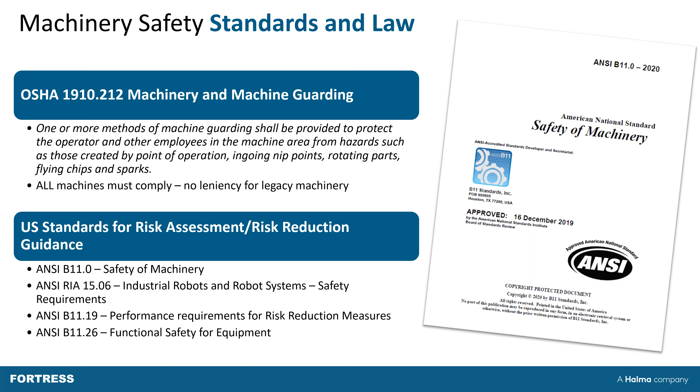Then what's going to be interesting on the next step is going to be B11.19 to look at risk reduction measures and B11.26 to look at functional safety. We don't have time to go into those in tons of detail now, but hopefully you can see how those follow on, and we may be doing more webinars and we can have a chat about some of that as well another time. So when do you carry out a risk assessment?

Some of you may think you've done a risk assessment before. Some of you may be here because you've never done a risk assessment and you're not sure where to start. And I'm going to say that actually all of you have done a risk assessment, even if you're not driving into the office much these days. You certainly will be driving up to intersections fairly frequently. And every time you come to a stop sign or any kind of intersection, you're doing a risk assessment.

You're deciding, is it safe for me to go? Is it not? Crossing the road, driving, anything like that. You're doing continuous risk assessments. And that's really important to remember. You already know what you're doing. It's not as difficult as you might think.

Another place is, for example, I do a lot of road cycling. When I go cycling, I will wear a helmet because that will reduce the severity of harm that might happen if I were to get in an accident. I'll also wear maybe high vis and lights, especially if I'm going at night. And that's going to reduce the likelihood of that hazard or that accident occurring.

So I do something to reduce the severity of harm. I do something to reduce the probability of harm. And I decide that that is an acceptable level of risk, and I go out on my bike. Other people might decide it's too high risk and prefer to stay in on the couch. That's up to you. Different people have different levels of risk and different levels of acceptable risk.

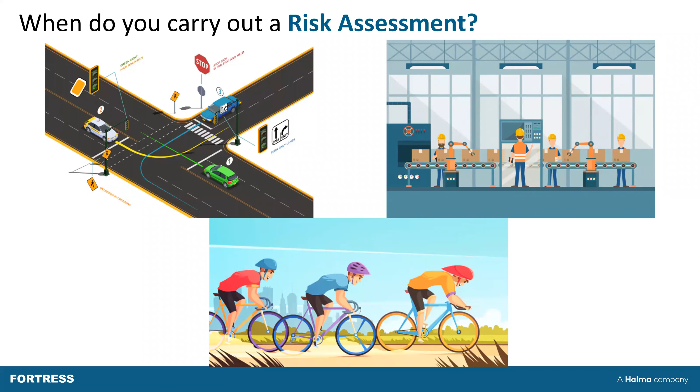And then finally, of course, what we're talking about here is machinery safety, industrial safety in a factory environment or anything like that. So why is a risk assessment important? Of course, that first one at the top there, reducing the rate and severity of injuries, makes a lot of sense. Hopefully that's why you think doing a risk assessment is important. You don't want people to get hurt.

Great start. However, there's actually a bunch of other reasons, if that's not good enough, to get that sign off on some safety equipment. It's great for employee morale, not only showing people they're cared about, but if they are allowed to get involved with the risk assessment process, which is really recommended, then they're going to feel valued and more likely to follow the requirements that come out of it as well.

Increasing the understanding of the hazards of plant operations. People often think carrying out a risk assessment is going to make things more cumbersome, more annoying, just putting things in the way. But actually, if a risk assessment is carried out well, you're much more likely to find processes which can be done better, accessing less frequently, shutting everything down less frequently, and actually increasing productivity. So there's really no reason that putting more safety in would ever reduce productivity. In fact, you can often make it more safe and more productive, which is a win-win for everyone.

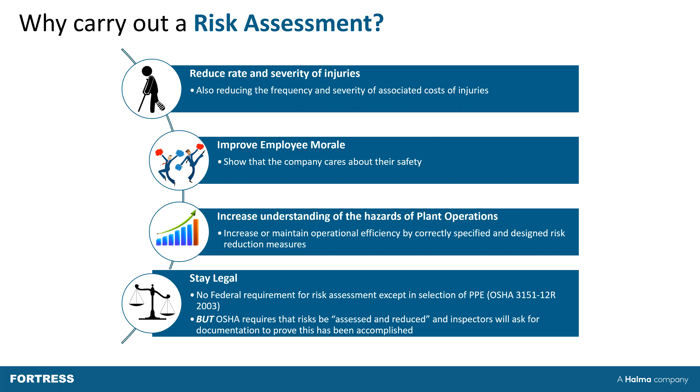Key definitions. An interesting thing about standards is often they're not necessarily the same definitions as in a dictionary. So in this, harm is specifically physical injury to and damage to the health of people. So we're not going to worry about if anything else is broken. It's only if people are in danger.

And then risk reduction measures is something that I'll mention quite a few times. People may know this as safeguarding or safeguarding measures, but we don't really like the term safe in standards because nothing is ever inherently safe. So risk reduction measures is much more accurate, even if it's a bit more of a mouthful, because it is reducing the risk. You may need multiple to reduce it far enough, or it may not reduce it very much, but it is still reducing risk. It's not necessarily making it safe in inverted commas, whatever safe might mean. And then acceptable risk is when it is at an acceptable level.

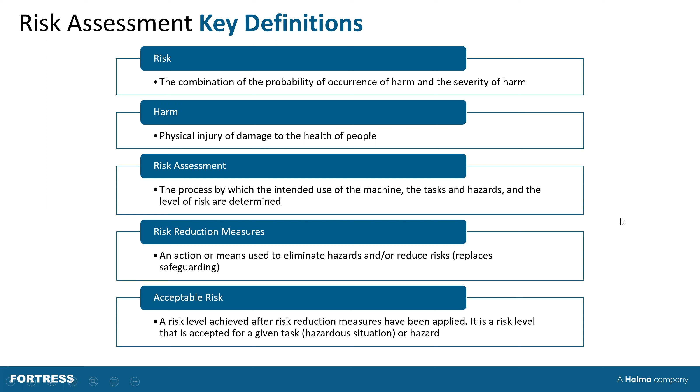So another kind of important step is thinking about who's involved. And then again, in standards, there's very specific definitions of who each person is, and this is what B11 uses. So you have individuals, which are affected persons if they're nearby, personnel if they're kind of employed to be near the machine. Those personnel may have different roles. So there's operators doing normal operation, there's maintenance personnel, there could be contractors, there could be cleaning personnel, there could be all different things within that.

If they've got some training, then they're qualified. Qualified, it's worth noting, doesn't actually mean they have to have a particular certificate or a college degree or whatever. It's training, education, experience, whatever is relevant for that role. And then if they've got permission to do something special, they're authorized, and then a supervisor is supervising. So those are just the terms which are going to be used.

So who is responsible for risk assessment is another key question which we get asked. Is it the person building the machine? Is it the person using the machine? Is it the company that owns the machine? In reality, everyone's going to work together, but the component supplier is going to be responsible for the components and providing documentation. The machine supplier is responsible for all the components that it puts together. And especially if, for example, they take a component and have to remove some guarding around it to make it into the machine, that's then their problem to make sure that it's still safe.

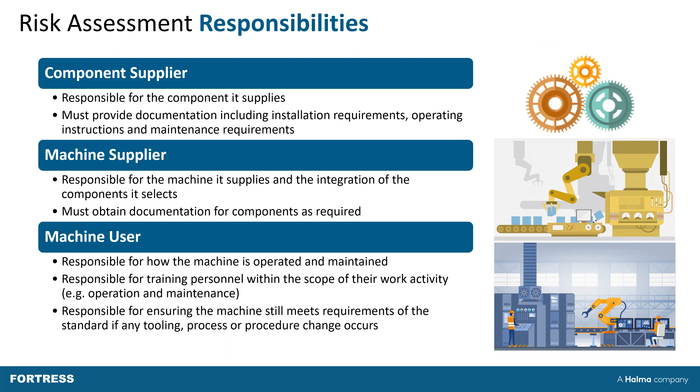The machine user is then responsible for how it's used, how it's maintained, making sure it's only being used within the limits which were set by the person who designed and built the machine, and also for training the personnel and making sure that it continues to meet all of the requirements as it goes forward. It's not left in disrepair, or it's not moved. Because if you put something in a corner and suddenly there's a hazard where it's awkward against the edge of the building, the machine builder can't possibly know that. So it's up to the user to make sure that that is considered.

So as I say, design phase, not only of the machine, but also of the system and of where it's going to go in the factory, how it's going to fit together. Risk assessment as early as possible and ongoing is going to save you a lot of time and a lot of money as you go along. So that's the intro to risk assessment.

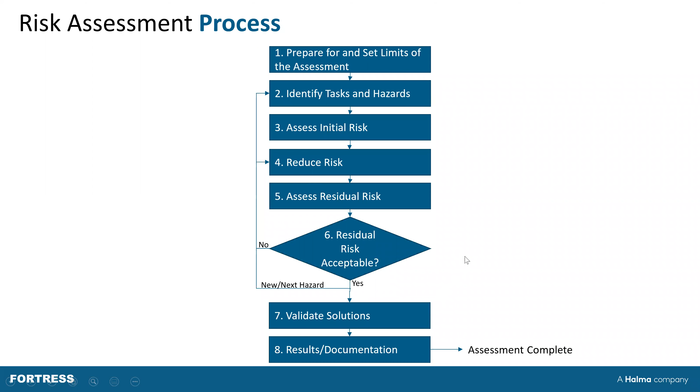So this is the flowchart, which we'll run through fairly quickly. I'm not going to spend tons of time on each individual step because I don't think anyone wants to do that right now, and it would take me far too long. But pretty much you decide what you're going to do, identify tasks and hazards, assess risk, reduce risk, assess it again, see if it's acceptable, validate it, and document it. Boom, easy, right? So what do some of these steps mean?

So preparing for and setting the limits. You're going to choose a team, which I'll discuss in a little more detail. You're going to set the scope. What does it actually cover? Which machines? How big an area? Is it the whole factory? Is it one specific machine? Is it one machine and all of the bits coming into it? All those different things. Is it for the whole life cycle? Ideally it would be, but is it not? Who is it covering?

Considering all of these things, what are you actually risk assessing? That's really important to get your head around, so make sure nothing is missed. And it's also worth noting what you're not risk assessing. So if it's not including the machine next door, make sure that that's obvious as well. So life cycle, as I said, through from design down to decommissioning. It's not just standard operation, but everything that could possibly happen to this machine, and how it's going to be taken apart and scrapped at the end is an important thing to think about. And then those limits, what's it being used for? Are there lots of different products it can make or different materials it can use?

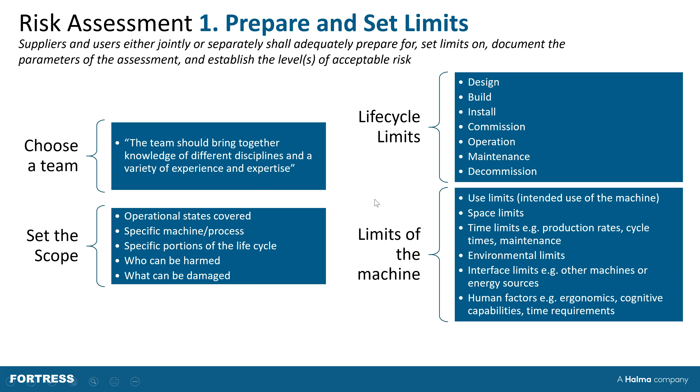Can it be used indoors? Can it be used outdoors? Can it be used with other machines coming in? What energy sources does it need? Are there certain power requirements? All those kind of things need to also be considered when you're deciding how this risk assessment's going to go.

So I said I'd talk more about team, and the team is really, really important, and it's probably one of the early steps, one of the first steps that you're going to have to do when you're thinking about your risk assessment. And as I said right at the start, hopefully someone was listening, an experienced and knowledgeable worker is actually your most valuable person in this team.

Yes, you can bring in external experts. Yes, you can have management. Management's great because it shows that it's being taken seriously, and they're probably more likely to have the checkbook. But the people who work on the machine day in, day out are the most important people to involve. And there are other people you can bring in.

If it's a big risk assessment, you're going to probably need a bigger team. If it's just a small risk assessment, it doesn't need to be many people. But a diverse and interested team, people who want to get involved, is really important. So you've got a team, you know what you're covering.

So then the first step when you're actually looking at the machine is going to be tasks and hazards. So tasks are things that you do. So normal operation, all the different things involved in that. Maintenance, routine maintenance, maintenance when something's gone wrong, like unplanned maintenance, fixing jams, whatever. Lots of different tasks that can be thought about. And then hazards, you're going to think about anything that could possibly happen to cause harm while you're carrying out those tasks, and also when you're not carrying out those tasks.

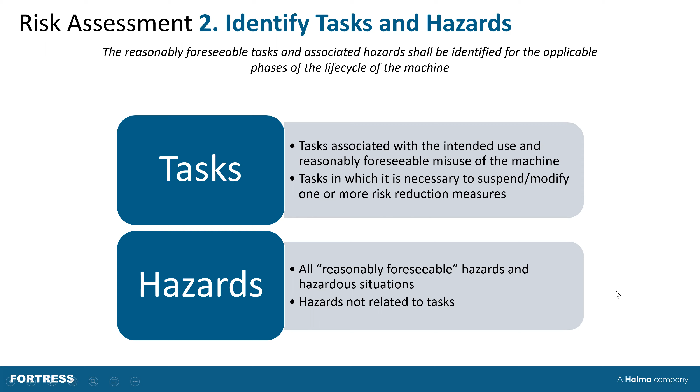So the tasks you want to think about: operation, processes and things like that. So standard stuff, that's probably quite easy. You just go through a day in the life and what has to happen with that machine. Interventions is really important because that's actually where you're going to have a lot of the more dangerous things, because that's going to be things you maybe don't think about, and it's where someone's like, oh, it's just a bit jammed, so I'm going to use a broom handle to poke it out. That's where you need to be considering. That's really important in your risk assessment.

Also minor maintenance, so standard maintenance that's going to be ongoing and doesn't necessarily need a full lockout tagout or a full energy isolation procedure, because any major maintenance is going to have its own risk assessment. But for stuff that happens regularly, you want to have it in the main risk assessment, otherwise it's going to cause you issues.

And then an important one I've highlighted here is foreseeable misuse. So anything that you could see happening, if it's really easy and looks like great fun to stand on the machine or climb over something or take something apart, if it's foreseeable that someone's going to do it, you need to consider it.

And foreseeable misuse also includes: if something exploded on the machine and someone jumped, are they going to hurt themselves because they were shocked? If someone touches something because it's hot, are they going to recoil and put their hand in something else? So it's anything that you can foresee happening, even if it's not a task that is meant to be carried out.

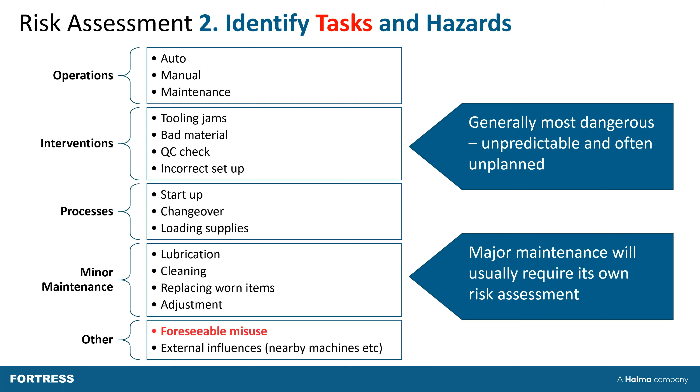So hazards, again, you've got to think about everything that could possibly happen, anything that's foreseeable. So from energy sources, different kinds of injuries from moving parts, does it give out hazardous gases? Is it going to be wet and you could slip? All different things like that. And again, the people who are actually doing it day in, day out are going to be those most likely to know what those are going to be.

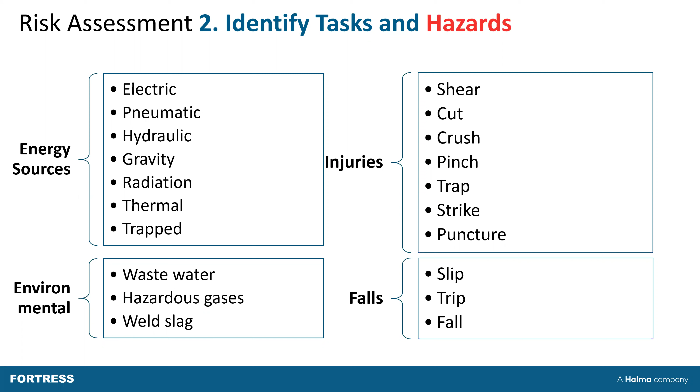So when you do that, you're going to probably take some pictures as well for your documentation. You're going to write a list. Excel is a great tool. Just ask the UK government at the moment. So Excel is a great place just to make a list of it.

You can put the area, put the mode, put the tasks, put the hazards, and a description of it is useful as well to know what you're talking about, because sometimes they can be similar, but maybe slightly different things. And so that's the first thing you're going to do, come up with all the tasks, the associated hazards, and then realize that some hazards maybe don't have tasks associated with them, things like that. So that's your tasks and hazards.

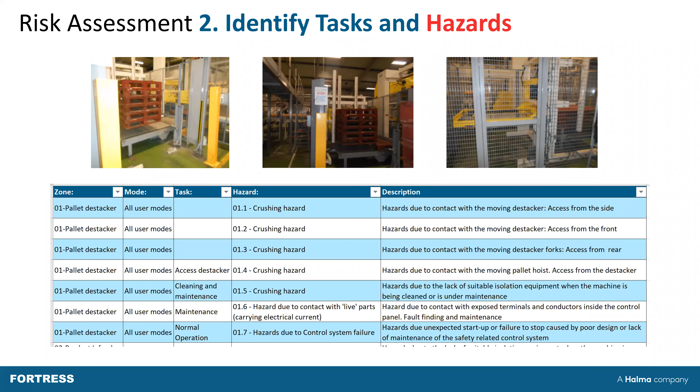Probability of occurrence, again, it's the highest credible level. Yes, there is someone who might manage to do something really stupid every single time they come near the machine, but you've got to think about what's actually likely to happen if someone's around the machine. You also don't need to include alien invasions or anything like that because they're not foreseeable and they're not credible. So that's how you assess your initial risk.

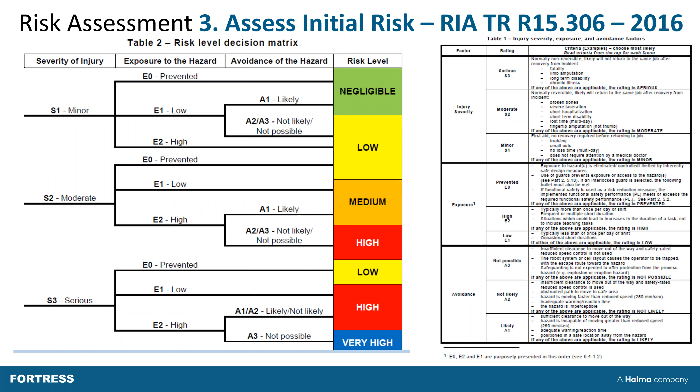There's also ways of doing it numerically. Hazard rating number is another way of doing it, where it's got 5 different parameters that are really specifically defined, and then you multiply them all together and it gives you a number. So what I'm trying to say is there's loads of different ways of doing it, and whatever works best for you and your situation. But what you're going to do is you're going to have a look at this.

Another key point, which I forgot to mention, was that when you're doing your initial risk, you pretend that any existing safeguarding or any existing risk reduction measures aren't there, because that means that you're not going to be biased by assuming that guarding is going to be sufficient or assuming that things are going to work. So you basically mentally remove anything that's already there to assess the initial risk. You can then add it back in and decide if it is sufficient later on.

So we're going to look at this destacker, and we're going to look at accessing it from the side. And in your mind, you're going to remove this grey guarding and think about how dangerous it's going to be. And so I'm going to say, because I'm the one talking, so I get to decide, that it's a critical injury that you could get.

Which is disability in excess of 3 months. I think you could probably break some bones, but it's probably not going to cause death. That's what I'm going to say. And I think it's going to be occasional. So occasional, because if there was no guarding here, it would be quite easy to get caught up in it by accident when you're walking past or accessing the area. So that's going to bring us out to serious, and that's probably going to be a problem. So we've got that serious level of risk.

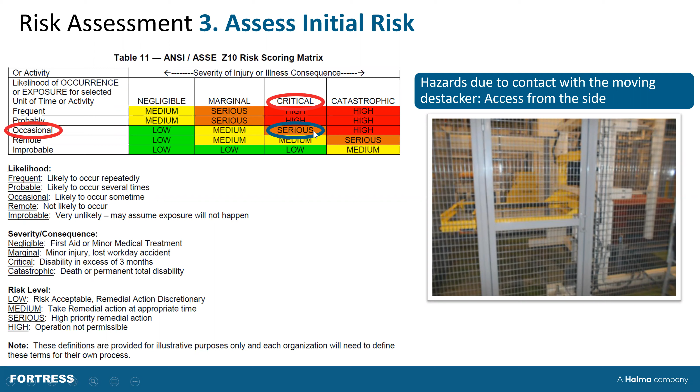And what we're going to do, we need to reduce that level of risk. So it's too high. And if we remember, risk is severity times probability. So to reduce the risk, you want to either reduce the severity of possible harm, make it hurt you less badly, or reduce the probability of occurrence, make it hurt you less often. You can also reduce probability of occurrence by reducing the need to access the zone, which is another good way of doing that. Just stopping people being in the area is going to reduce how often that injury is likely to happen.

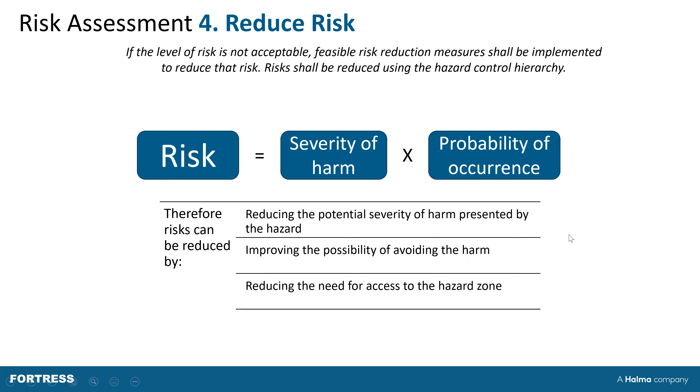So now we come to my favorite part of the whole risk assessment process, which is the hazard control hierarchy, or the hierarchy of controls. And this is probably the most important thing to take away of how to reduce risk. So the first step you should always try and take if you've got a risk you need to reduce is to get rid of it, design it out. You can eliminate things, you can substitute, use less dangerous materials, use less power. If something's a crushing hazard, make it such that the gap is bigger. So instead of completely crushing your arm, you maybe get a slight bruise, or maybe it doesn't get close enough to touch your arm at all.

Put things out of reach, build engines inside things rather than having power transmission on the outside where you can get caught up in it, things like that. So anything that just makes it inherently safer is going to be 1,000,000 times better than anything else, because you can't avoid it, you can't turn off things, you can't forget to do your training, forget to put your hard hat on, it's just safer. So that's always the best thing to do.

If you can't do that, the next best thing is engineering controls, which are going to be guards, control functions, devices. So that's loads of different things, basically anything that physically stops a person being able to come into contact with a hazard. So a guard physically stops a person coming into contact with a hazard. An interlock also does, because if they open the door, the machine stops, and so they can't physically get to the machine while it's still dangerous. So removing human intervention.

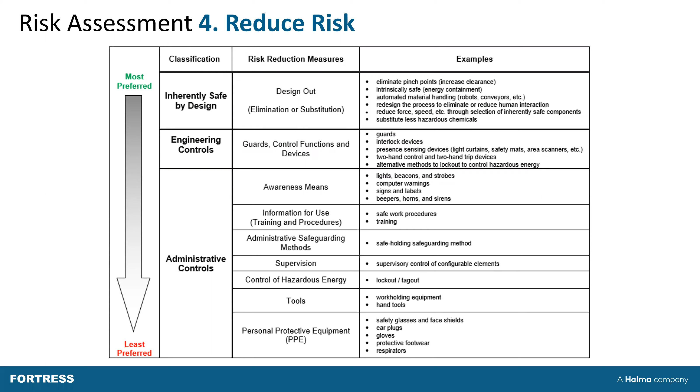So just to show this in a vaguely practical example, pretend that he is washing a window, he's up a ladder, he's wearing a baseball cap instead of anything else, he's not got any harness on there, no one's holding the ladder. That's really high risk, he could get really badly hurt, and it's pretty likely to happen. So I'd say that's very high risk.

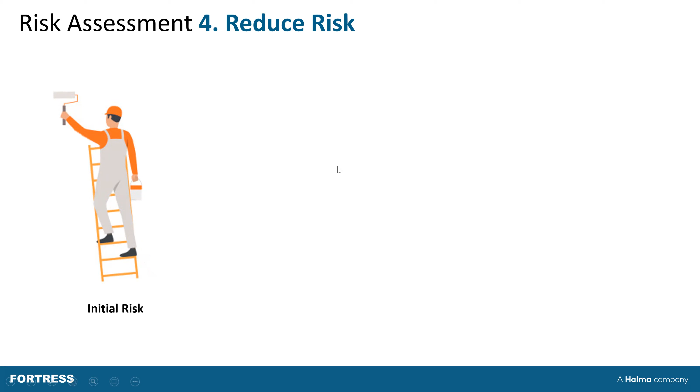One way of reducing that risk is to get a cherry picker, nice expensive bit of equipment, and put a hard hat on. He's much less likely to fall because he's now on a stable platform instead of on a ladder. He's got a hard hat, so maybe the severity of harm is going to be slightly lower if he were to fall. So that's great, but the first thing to consider should have always been to design it out. Keep him on the ground, get rid of that risk completely. Can't fall if you're already on the ground. Well, you can, but you're not going to get as badly hurt as if it's off a ladder.

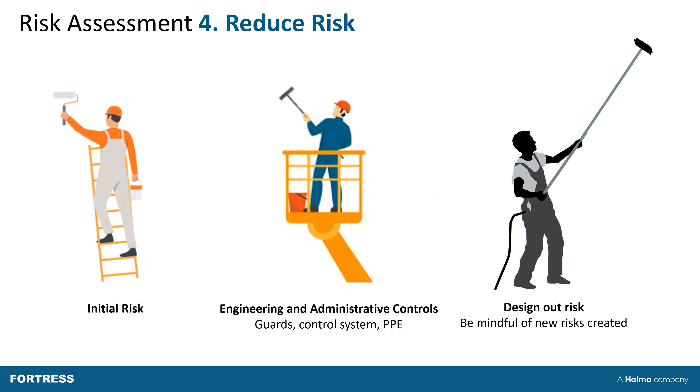So that's reducing risk. And if we go back to that example we had, as you can see here, what they have done is put some guarding on it. And if you don't need access, then just put some fixed guarding on it.

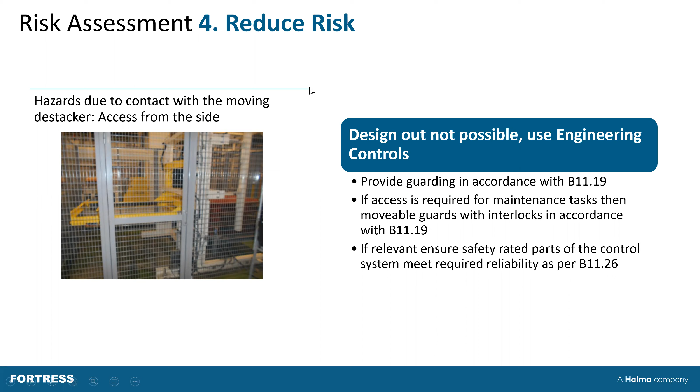If you do need access, then you'll want to put some interlocks on, and then consider B11.19, which is going to tell you how to make sure that your risk reduction measures meet all of the requirements, which we are not going to have time to go through today. But if you check out our YouTube, we can talk about risk reduction measures all day.

And when you've done your risk reduction measures, you then need to work out if someone's going to try and defeat them. And I think Malcolm is going to jump in and speak about this for a little bit. Yeah, I am. Thanks, Eve, for that. So, yeah, motivation, incentive to defeat is something that's close to my heart. I'm working on a couple of standards committees where we're covering these topics.

Now, a few years ago, I visited quite a well-known pet food manufacturer who had a conveyor palletizing system, and they were using some non-contact switches on the doors, and they'd actually managed to tape one part of the switch to the other to be able to run the machine with the door open. And I took the operator to the side and said, why are you doing that?

And there was a problem with the conveyor in that it was pushing boxes off towards the edge of the conveyor and actually over the side. And the operator was keeping the door open and kicking the boxes back onto the conveyor. And it crossed my mind at that time, we could solve it in a couple of ways.

We could make it harder for him to defeat the interlock by putting maybe a mechanical interlock, an actuated interlock in there so that he couldn't tape things together, or additional RFID, etc. But the real issue was the fact that the conveyor was not operating properly. And I think one of the things with incentive to defeat, the big thing that we see is not enough time is spent getting to root cause.

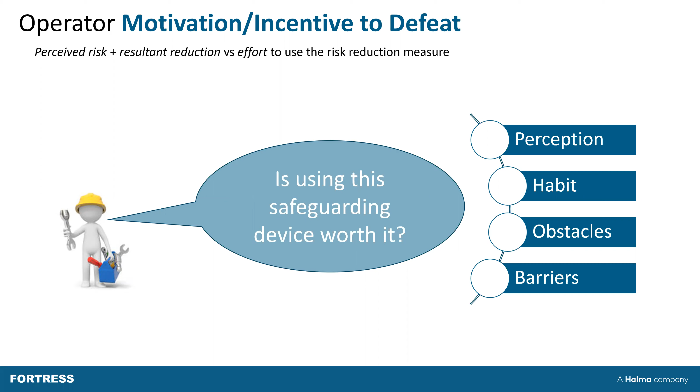And I think we have another slide on this, just covering some of the things to consider once we're looking at motivation to defeat. And you can see some of the things, like setup and adjustment modes, modifying tool change, the reason for operators having to go inside, troubleshooting the machine. There is the real opportunity, and Eve talked about this earlier, of making your system way more efficient and effective and productive if we solve those problems and remove the need for the operator to enter that space.

I'll make one further comment before handing back to Eve. A few years ago, again, in a steel producing plant, when they were doing the risk assessment on an existing machine, they were upgrading the safety to it. The operators had to enter the safeguarded space to apply oil to a specific point in the machine. And that meant the operator was shutting the machine down, gaining entry, applying the oil, coming out, restarting the machine.

They solved what they saw as potentially a hazardous situation for the operator by having a plastic tube going to the point where the oil needed to be applied and then applying the oil from outside the safeguarded space. So they were protecting the operator and they didn't have to shut the machine down, so improved productivity. So I would encourage you, rather than use security fixings on safety devices, get back to the root cause and reduce the need for that interaction between the operator and the machine.

Awesome. Thank you very much, Malcolm. So at this point, we've decided on our risk reduction measures, we've reduced the risk, we've made sure that our risk reduction measures are not going to be defeated or there's no motivation to defeat, and if there is, we've done something about it.

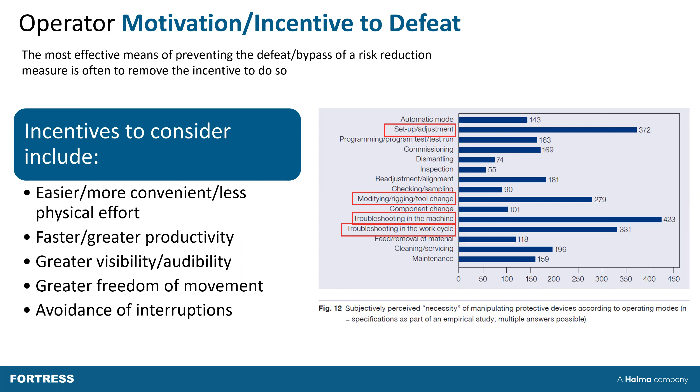What we do then is we take those risk reduction measures and we decide if they're enough, because it may be that there's still too much risk left. So we assess the residual risk once you've included those risk reduction measures. So if we go again back to this, we've got this fixed guarding in place. I'm saying it's fixed to make my life easier on this slide, but it could be movable guarding as well.

So we have guarding in place, and the important thing to remember with guarding is it hasn't got rid of that hazard. That hazard is still there, and if you were to get to it, the harm it would cause you is exactly the same. So it's still going to be critical. And that's a really key point, is that guarding and almost any engineering controls are not going to reduce the severity of harm, but what they are going to do is take it from occasional, which we had before, down to improbable, because you can't get there.

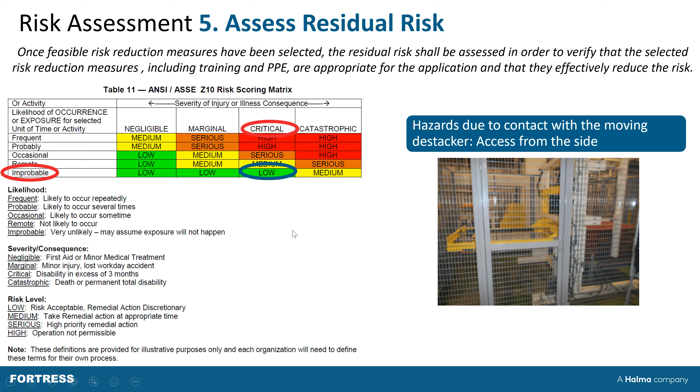So if you cannot get to the harm, it's not going to happen. So we're now at a low risk. And then the next decision to make is, is it acceptable risk? And what we come down to for this is as low as reasonably practicable is generally what you're aiming for, which is not to be confused with LARP, which is live action role play. We are talking about ALARP, as it is often shortened to in standard circles or by very cool people.

So the first things you want to consider are your regulatory requirements. So that's if there is a type C standard, a specific standard for that type of machine, or if there are specific OSHA requirements that say you have to have this type of guarding, or you have to have this type of risk reduction measure, then you have to put that in. That always has to be there. After that, it's going to be down to the team who are doing the risk assessment. And that's going to mean you've got to think about the culture of the place.

If everyone is very highly trained and they're not likely to have any issues, then maybe a higher level of risk is acceptable if they're all aware of it and aware of what to do to avoid harm. However, if there's untrained people or even members of the public are likely to come into contact, then you're going to want that level of risk to be much lower. And basically, you want to get it as low as reasonably practicable. And what that means is at some point, it's not going to be worth it anymore. You're going to end up spending huge amounts of money to achieve very, very little risk reduction. So it's putting in as much risk reduction to achieve that acceptable level, but without kind of being ridiculous.

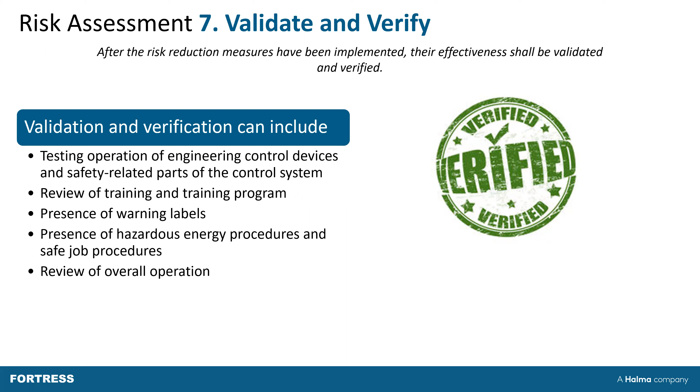And then finally, you're going to want to validate and verify. So test that these things actually do what they're expected to, making sure that the testing doesn't expose people to harm. So it's not like you build a bridge and then go, oh, we need to test if it's stable, and run and jump in the middle. You want to come up with a way of testing so that if it doesn't work, you're not going to get hurt. And you want to think about, are we doing the right things? Are they being done correctly? And then do those safety functions work? Is everything in place? Is everything working as it's meant to? Validate and verify.

And I said that was the final one, but the next one is the most important, is to document it. So as I said, spreadsheets are great. You can put all of the right information in. You want to get hold of all of the information from the supplier, all of the documents that you've produced and thought about, and kind of write down all of your assumptions, all of your reasoning. So especially with that acceptable risk, if you've decided that there's a level of risk which is acceptable, or there are residual risks and you're happy with them, that's fine. But you do have to write that down and say there is still this risk of this, and we are okay with that because X, Y, Z. So yeah, making sure that everything is really well documented in case it ever is needed.

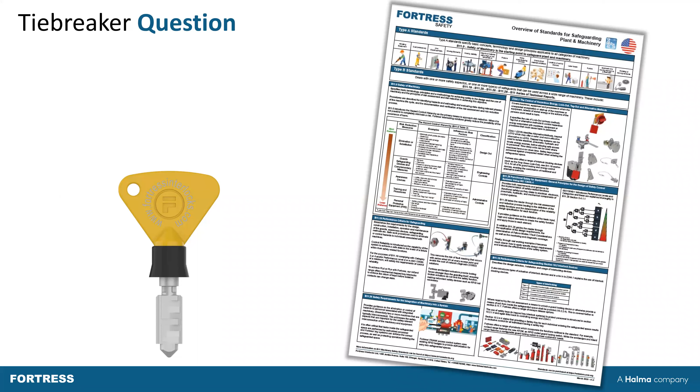So according to the hazard control hierarchy, which is the next best risk reduction method after designing out? So you should always design out if you can. And what's the next best thing to use? If anyone can remember what I said there, what kind of controls should be used?